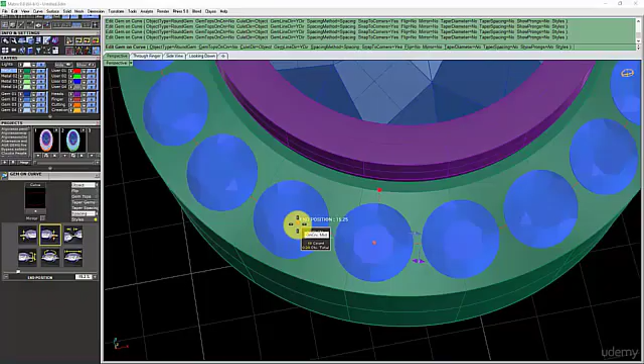Okay, so we have the stones in place, and let me save it just in case I lose it. Then what else? We're gonna make the holes.

So we select the stones. As I mentioned before, when we place gem on curve, by default they will be grouped. So if I click one, it's grouped. F6, gem cutter,

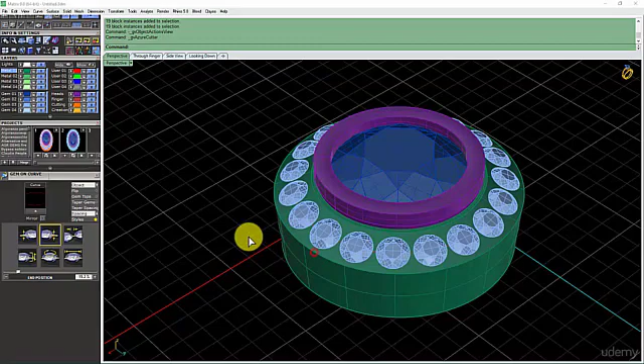and it's gonna open this. This is new from Matrix 9. I always use this one. You cannot see it here, but here it should be a little line. You'll see that later, but it's like a new thing from Matrix 9. It's kind of useful, I kind of like it.

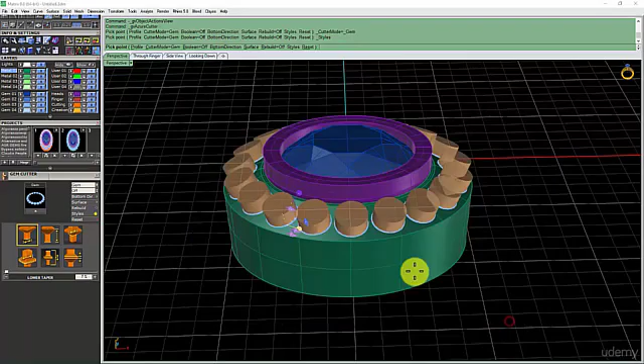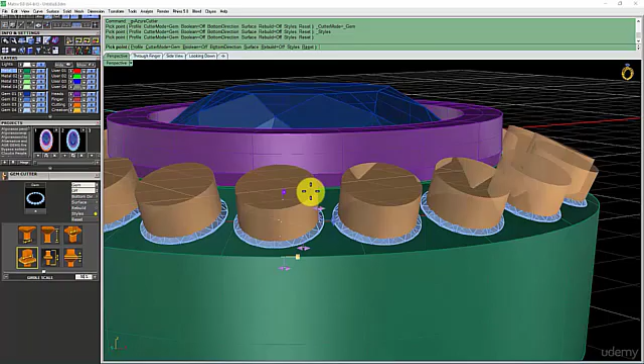Again, by default it's gonna make 100% or 98, whatever. Let's make it 90. This is basically because although we decided all the stones are gonna be 1.5, they will never be exactly 1.5. In reality they might be a tiny bit smaller, a tiny bit bigger. So that's gonna help, basically giving a bit more metal to the setter.

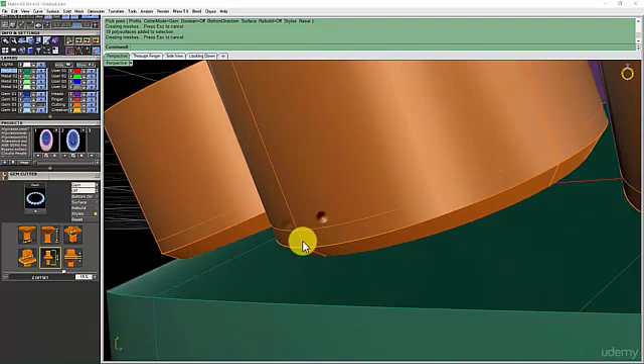Then I'm gonna raise it up a little tiny bit. 15% is fine, basically because I want it to have like this. I don't want the hole to be so deep. Again, it's the same thing, giving more metal to the setter.

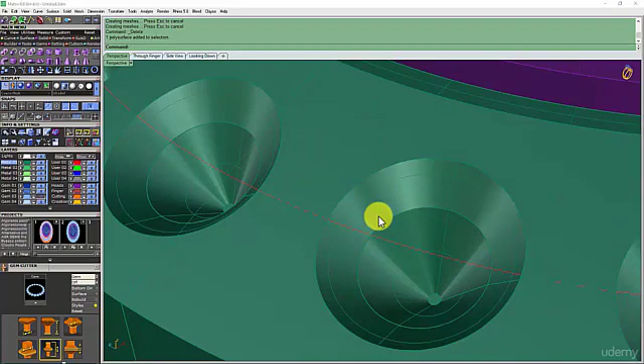Boolean difference. Okay, and this is what I was telling you before about that little line on the cutter. This is new from Matrix 9. The cutter has already made a little line here, so basically it splits the surface in two. So if I just explode it, I can just delete it.

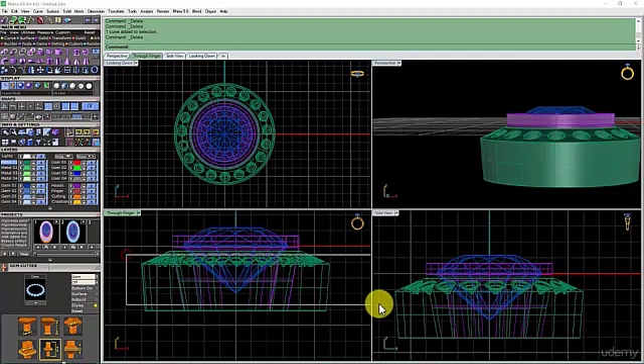Which in something like this doesn't make a massive difference, but imagine you have a ring full of pave - it does help a lot. So I'm gonna delete it all. You see how I selected that? Left to right, and I select all this.

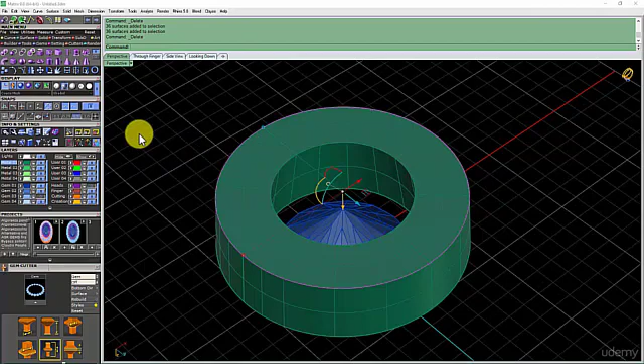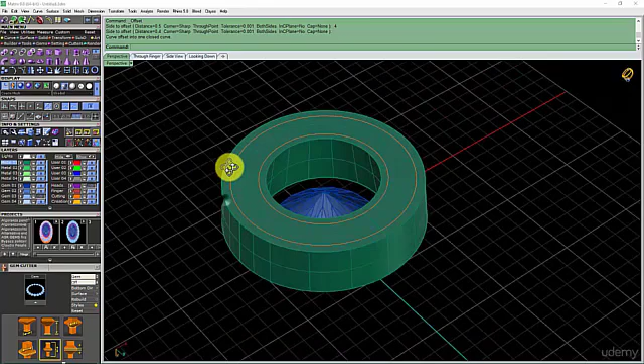Okay, now it gets a bit more interesting. I have this line and that line, and this line. I'm gonna make an offset on the outside, 0.4 - or in this case it could be even a bit more, 0.5 on the outside, but on the inside we can easily keep it 0.4 instead of 0.5. That's because the outside, when we clean up the casting, we'll probably not even touch the inside, but the outside we will.

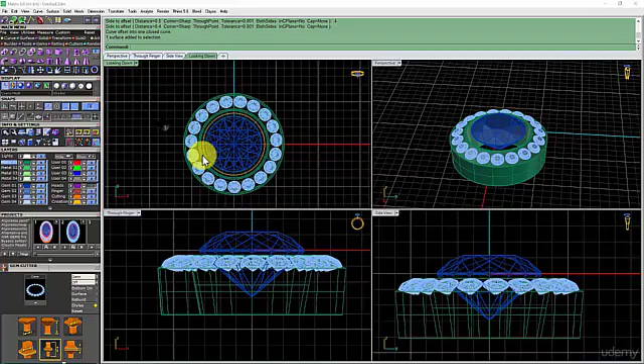So it's always a bit better. What else? Okay, now we need to create the divisions. First of all, you see the stone here is not aligned completely in the center. Let's do that first - we rotate from 0, enter, to there. Now it's aligned. We can hide this, we can actually even hide this.

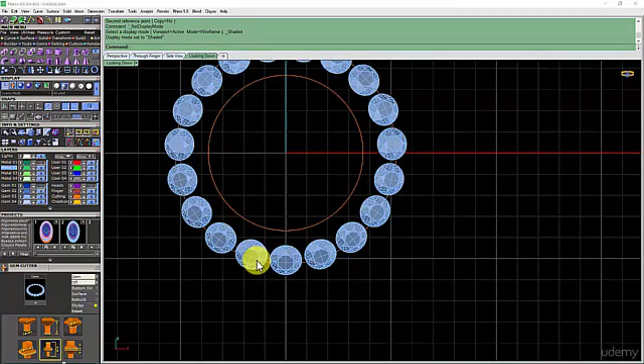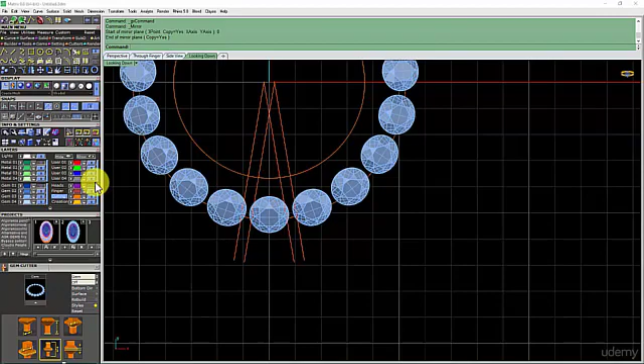And we're gonna make a line between the stones. Make an offset, 0.2 on each side. And we make a mirror. Now if we hide the stones, we just have to make

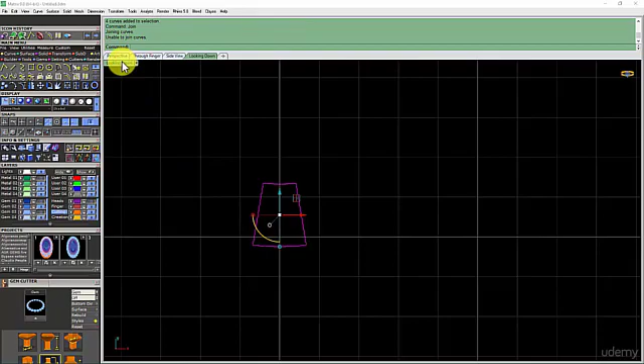trim, and get rid of all this. So we have this only, and I'll join it. You see it's unable to join curves - that's probably because they are different levels.

You see? These two are higher than these two. How do I sort this out? Get into looking down view, project to C plane, delete input, yes, and join. That basically is gonna put all the lines at the same level, at the same height.

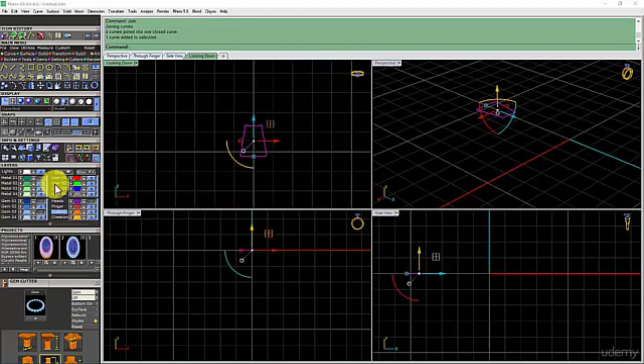And yeah, join it. Let's show everything again. Now as you can see it's higher because it's on the C-plane - the C-plane is here. I probably should have started having this on the C-plane, but it doesn't really make a difference.

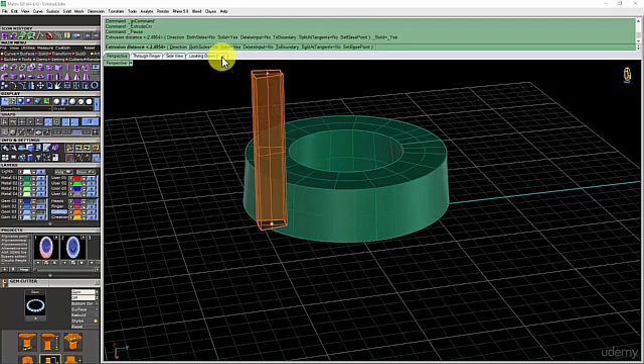Right, solid - it doesn't need to be actually solid. Okay, so I just made an extrusion, so I turned the curve into a surface.

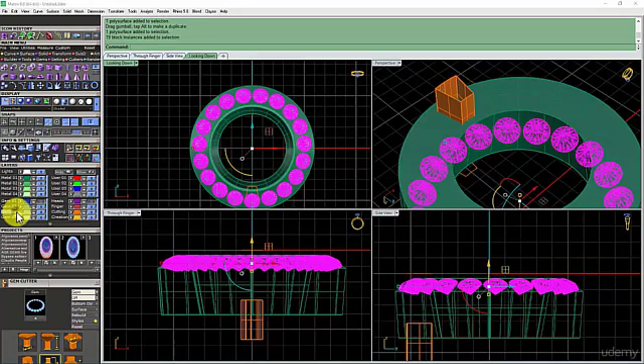And now I just have to make a polar array of all this. I need to know how many stones I have first, so let's count the stones. By right clicking on the layer where the stones are, it's gonna let me know how many stones I have - in this case it's 19.

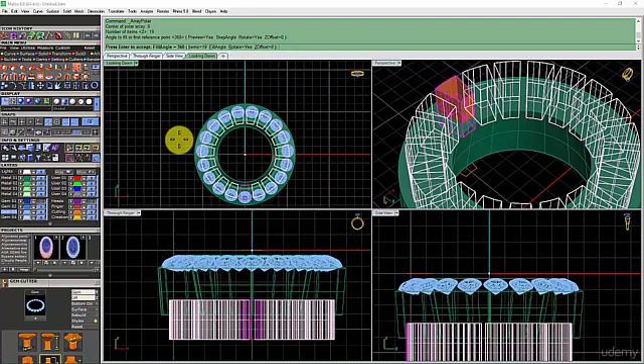So now again we select this. Now that we know how many stones we have, center of polar array, 0 enter, and 19. Yeah, okay. Why have we done this?

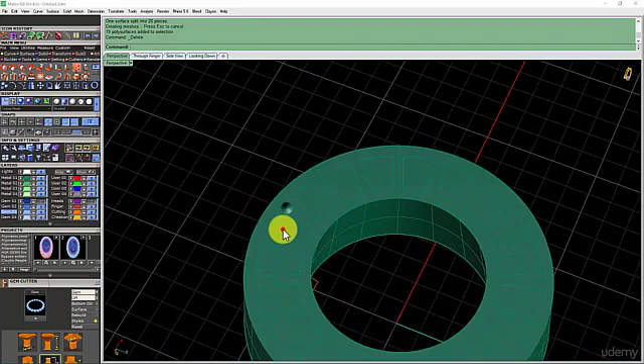Because now we want to split this with the orange cutters. How do we do that? Split - we select this surface, enter, cutting objects, these ones, enter. We can delete them now, and now we have split the surface.

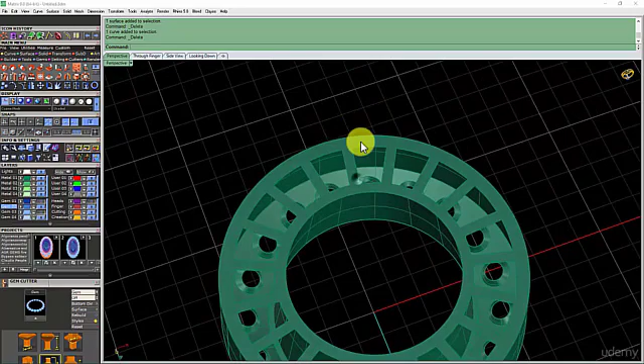Okay, now we hide the stones. Now the only thing left to do is create the surface that goes from here to here. How do we do that? Very easy, we just have to duplicate the edges,

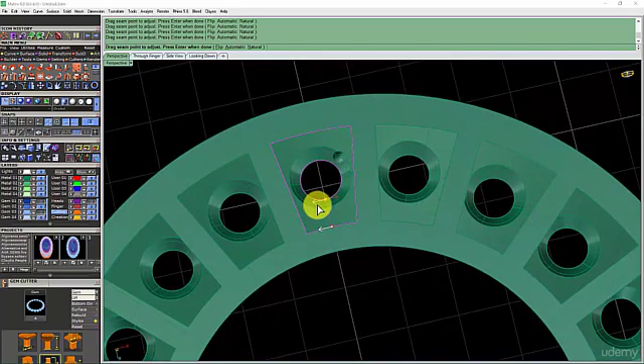these edges, okay, we join them and we make loft. Loft - make sure the arrows are positioned correctly, always pointing at the same direction. Let's make it natural.

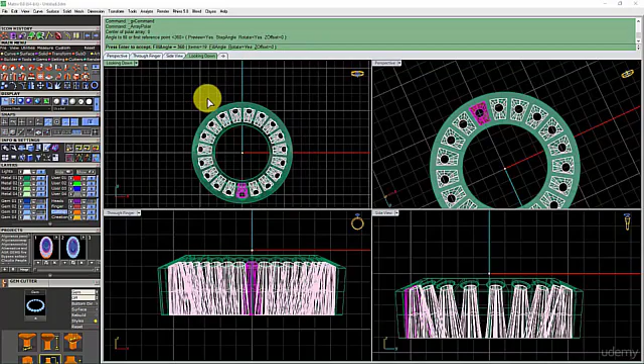Yeah, that is fine. And now we just have to make another polar array, 0 enter - it will keep the same last number of items we used before, so we just have to press enter. 360, enter. Select everything and join. That's it. Let me show everything, let me save it.

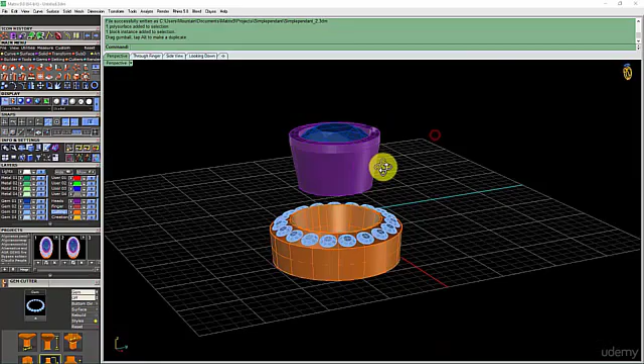So this is basically the pendant finished. As you can see, we'll be making two parts. We could even make this in, for example, white gold and this in yellow gold, or any combinations you want.